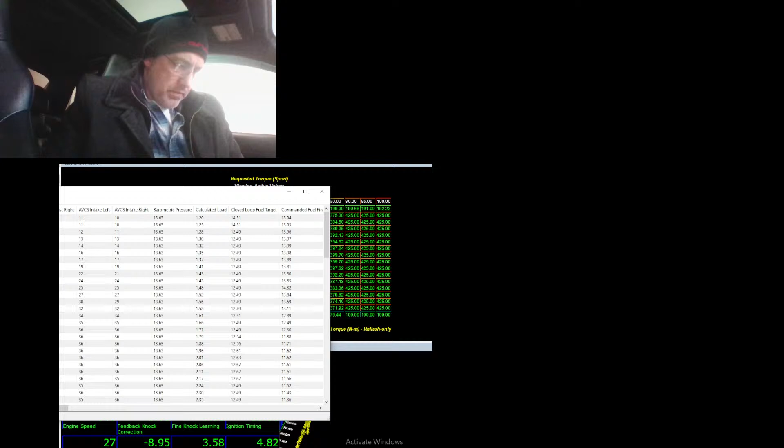Alright, so that dyno pull was rich as balls. In fuel final, you can see it goes into the 10s, and the air-fuel ratio at the tailpipe did in fact go to the 10s, so I can lean it out now. Always like to make sure that it's accurate, that it's going where I think it's going, before I start pulling fuel out during the tune. Otherwise, you know, who knows where it can go?

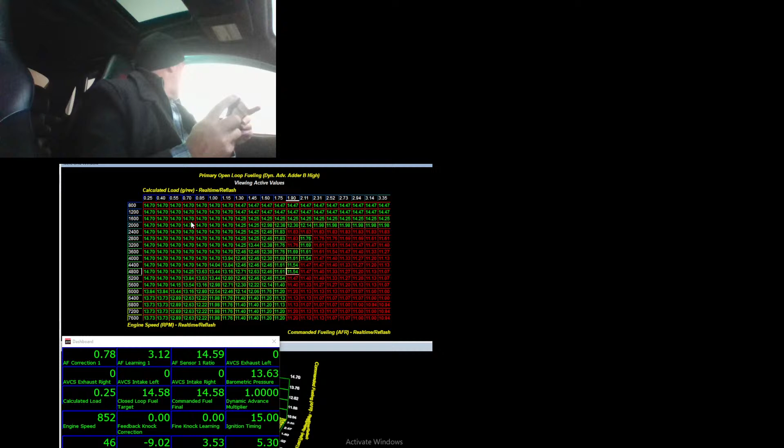Main fuel final still 10.6. Still kind of 10.6. Yeah, I'm not seeing any change at the tailpipe. It's really rich for 14 pounds of boost. I don't like that at all.

Wow. 304, huh? 304. It's 100 horsepower more than them showing at the wheels. I mean, timing's really conservative, but only seeing 200 at the wheels doesn't make sense.

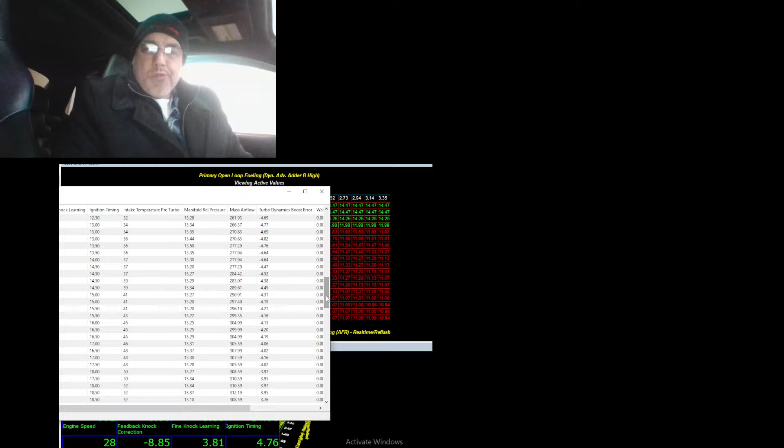I'm seeing 10 to 1 at the freaking tailpipe with a command of 10.6. Huh. MAF calibration looks fine. Injector scale is correct. Latency is correct. It's an awful lot of fuel.

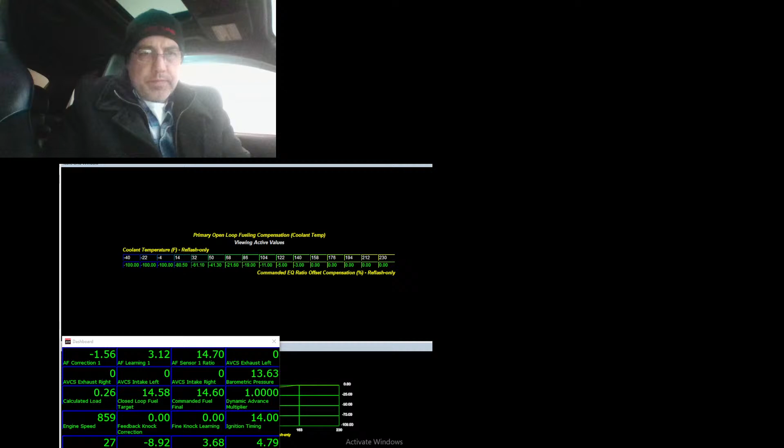Probably on the wrong fuel map. Yeah. I'm on the reflash fuel map, not the real-time fuel map, due to the weather conditions here right now. So that's a shame. Makes it a little harder to tune like that. It runs really good though. It seems to run really well.

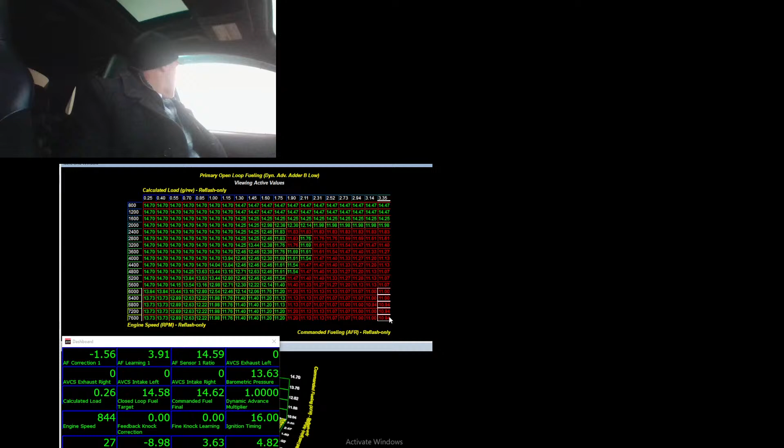Let's go to MAF comp and see where that's at. Zero. Load comp, 0 and 0. That's annoying. So it gets really rich right at 6,000, which is weird. I mean, there is this step here, but it is definitely rich at 6,000. Like this. Just make some lines, some straight lines for now. Oops. Wrong button.

Dynamic adder. Let's see what my condition's set at. Dynamic. Low. Low. That's high. That's good. Do want to lower that timing right here, like I said I wanted to before. Pull 1.5 degrees out. I'll pull a couple degrees out. There. 3. Right here. Okay.

Oh, it had timing too. I don't like this map. I don't like it like that. I don't see a point in that. If anything, we'd have less down here. Minus 50. High loads. All of it. Here. Knock barely happens up there. The big knock ranges are right here though. The biggest knock areas are right in this range, at higher load. So we'll do that.

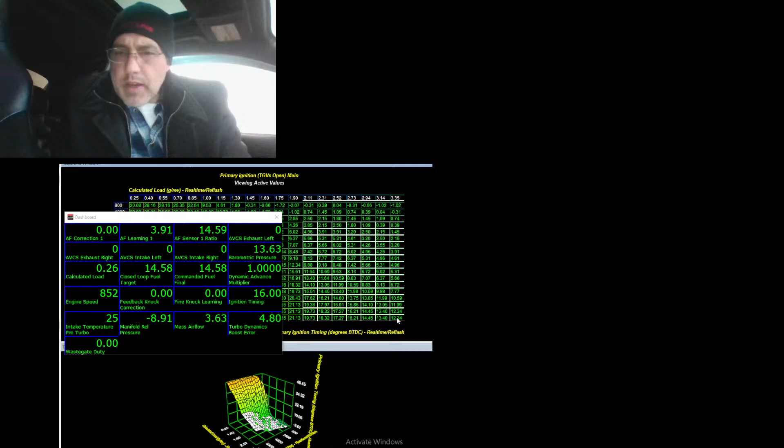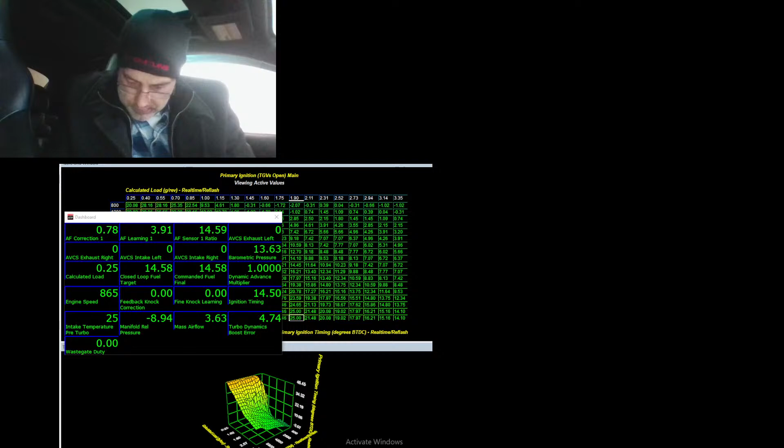Got that super conservative right now for the base map. I have that timing back in, down in this area. I just grabbed it for the base map from right here. Where was it? Right here, and I hit minus minus. So I'm just gonna plus plus that again. Bring that spot back up. Reblend this section like that. Alright. Gotta flash this, unfortunately. Might do some boost while I'm doing it.

14 pounds. So 14 PSI target, or I'm sorry, 14 PSI at 0 wastegate duty cycle. So when I get my targets in here, I'm actually going to compare to an existing map, so I can just cut the middleman. Where is a good one with a 2.15? This one probably is a good one. It's a decent 1.5 target map. Alright. So, bring this target map in. I like it. Okay.

Now, I know that it makes 14 on the gate. So I don't want to add any wastegate duty cycle here at 330 because it'd make the car oscillate. This is something for Kurt especially. He was talking about his boost before. But I know at 15.9 or 16, I need a little bit added to the gate to get that. So if I look at 340 and up, I need to add wastegate duty to that. So I go back to my wastegate duty table here and I look. So 330 is right here. This is going to yield me 14 at 0. So I don't want to add anything there.

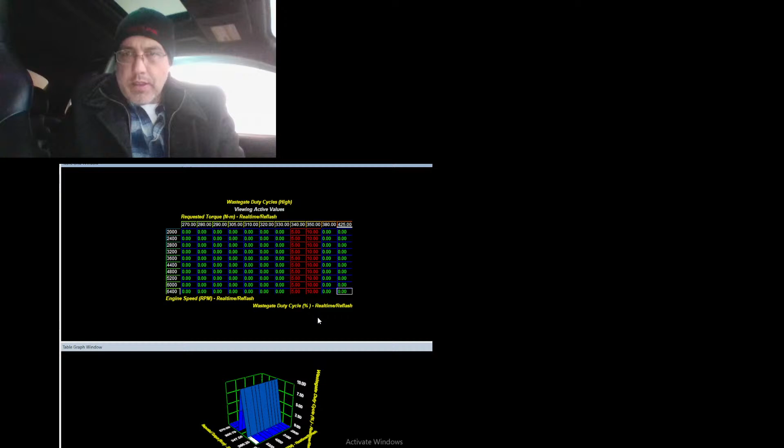Now, in factory form, there's a lot added there because the wastegate pressure on the factory turbo is 7 pounds. But this is 14 pounds, so I don't want anything to the left of that. Now, at 340, my target was only like 16 pounds. So I'm just going to do a blanket 5 right now. And then at 350, my target was 16.5, whatever. So I'll make this a blanket 10 right there, like that. Now I'll make these upper ones here 20 and a 15.

Hey Dom. Yeah, dude, what's up? What do you sell your crank pulleys for? 165. 165? Yeah. What's your availability on those? I got them at home. Okay. Alex is here and his crank pulley is wobbling all over the place. Who's Alex? He's a customer. And I was like, you should replace that ASAP, and then he asked what I recommended, so. Yeah, mine definitely won't wobble. You said 165? Yes. Okay.

Alright, so that's what I'm going to do initially, and then as I get a feel for how it behaves, then I will adjust it and add taper to it as needed, maybe a little tail off at the end, might go up, might go down, we'll see how the turbo behaves. Typically it goes up a smidge on this turbo, and then I add a little more duty cycle down low with lower RPM to try and make it spool a little faster.

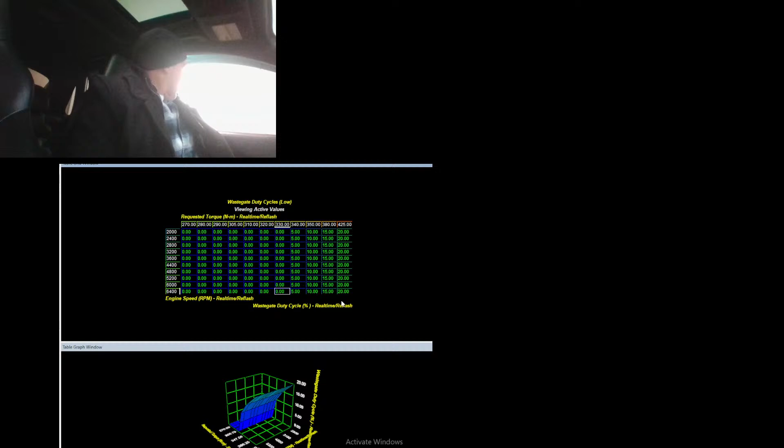But honestly, it's doing really good already. It's actually doing surprisingly well, and so what that'll look like is I'll take this area here, for example, and might make it 90, something like that. In fact, I'll just do it now, fuck it. Now, if you do it too close, though, you get your boost to overshoot, which you don't want to have happen.

The other thing you want to do to prevent integral windup on your boost control system is go to your turbodynamics, go to your activation, minimum RPM, bump that up. I did already. That prevents the integral from winding up while you're in an area where the turbo can never make boost in the first place. So I did that. Also, temperature compensation on these is set really high. I got to change that too, actually.

Because I moved the intake air temp sensor and because the system has a different set point in general, I start with half, and that gives me an idea. I've had to go down as far as 0.2, so 20% of what it is. And then here, I don't need to add 15% because 15% is definitely going to do quite a bit of boost. So I'm going to lower that down to 10. That just keeps my integral from winding up too far and all of that.

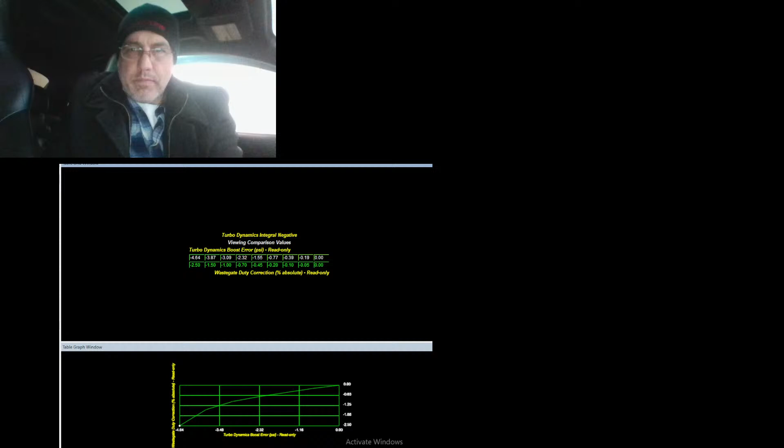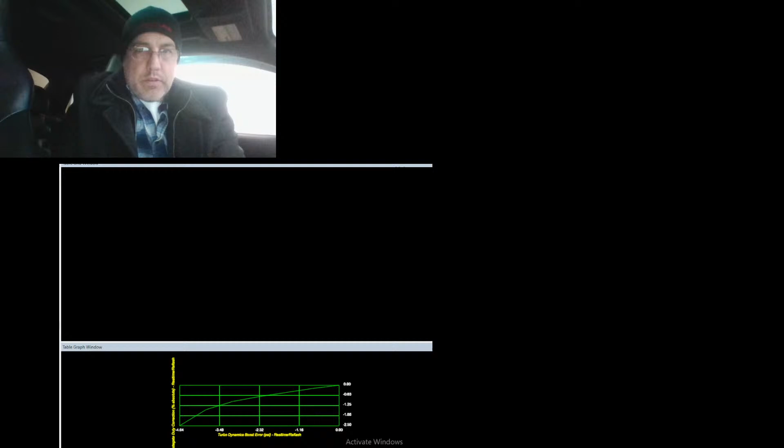These are... Why are they 0? What the fuck is going on? Oh wow, that's a trip. Okay, so I had no integral at all. Luckily I didn't try and do any boost yet. I must have hit 0 on it without realizing it. Alright, so there we go. Now I have the functioning integral. Perfect. Now we're going to flash this.

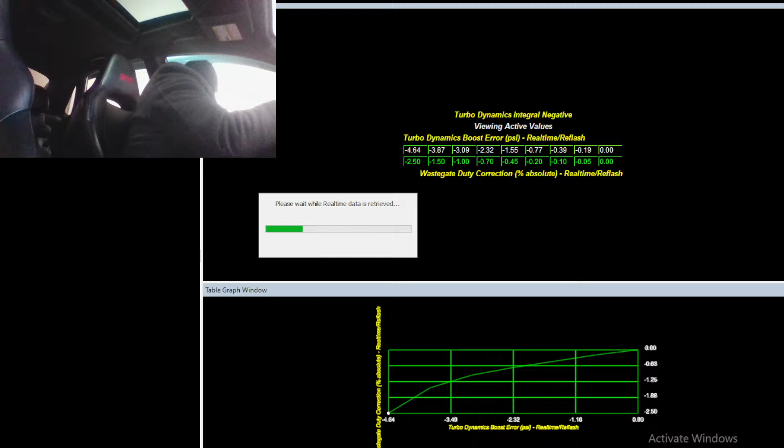I see the horsepower actually goes up. Oh, you know what? My temperature says like 12 degrees. I didn't hook the temp probe up.

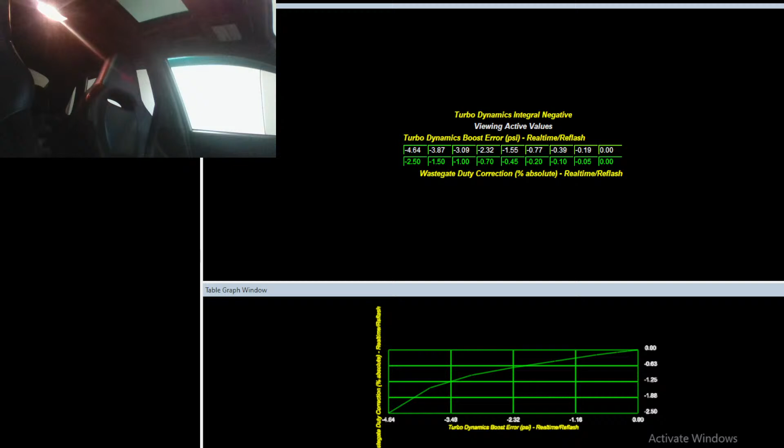Good. Glad to hear it. New boost controller on order. Good. I love the factory boost controller for the factory turbo. I tell people all the time, don't change it. You guys put 3 ports on the stock turbo. It makes no fucking sense to me. I cover that actually in my boost control video.

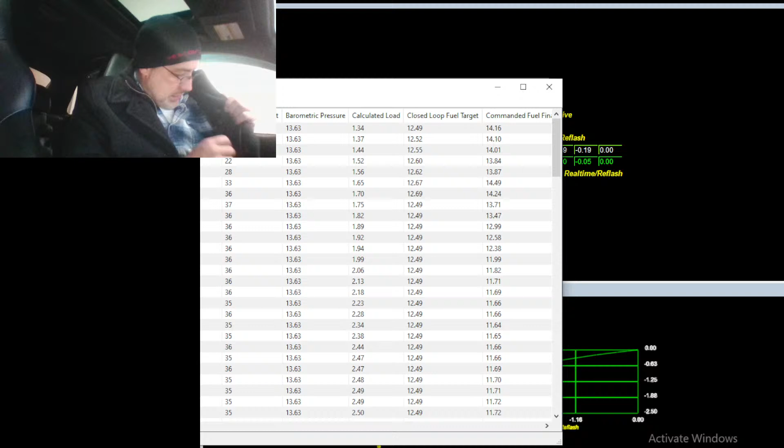So the ignition helped as well. And really, the ignition probably helped with the fueling too, because I had it so conservative that it probably wasn't getting a complete burn, and that was why the ratios were so damn rich. And that's something to think about too. It's kind of hard to grasp sometimes, but if you're not lighting up the air fuel mixture and burning it at the right time, you'll have a lot of unburnt mixture leaving the engine.

Now look here, my timing is still really conservative for 13 and a half, 14 pounds of boost. I've only got 17 degrees at 6,000. That is not a lot of timing. At peak boost, at lower RPM at 4,000, at 13 psi, I only got 14 degrees of timing. So that is really conservative, and I'm fine with that. I'm gonna mess with the boost and get it where I want it before I start adding more timing.

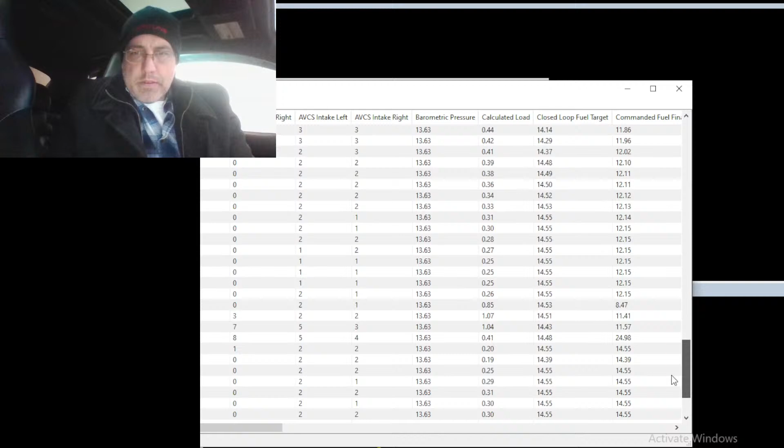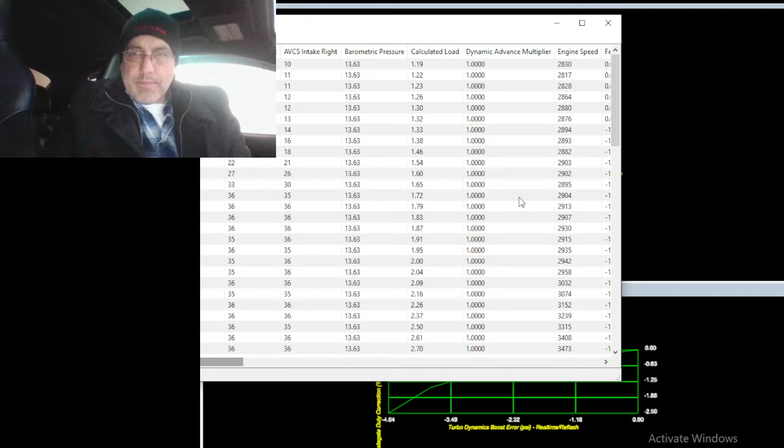It was clean. There was no knock feedback or anything that I saw, and AVCS is tracking as it is currently programmed. So that is good to go there. I'm happy with that. So I'm just going to add more duty cycle to the wastegate. Oh shoot, I closed that, didn't I? This is the last one. Yeah, it's the last one. Shit.

I didn't expect 20% to do it. That's not true. I expected 20% to give me some boost, but it didn't. Oh, you know, I didn't look at it. I should have looked. I didn't even look. That was not the best judgment of mine. I should have checked that out. Let me take a peek here. Just adding some percentage to my wastegate maps. Save that.

What am I at now? 28 degrees right now. Remember, this is post intercooler. This isn't even into the turbo. This is post intercooler. So I got a pretty big fan on. It's on high, blowing on the intercooler. As you can see, it's 20-something degrees outside.

And if they shoot up, that tells you a lot of what you need to know about your turbo, your intercooler, all that stuff. And that's why I always recommend that you move the IAT post intercooler, because those IAT temperatures, they will surprise you how high they get. And you'll be like, oh shit. The ECU has no way of knowing that that's how high they are if you don't do it.

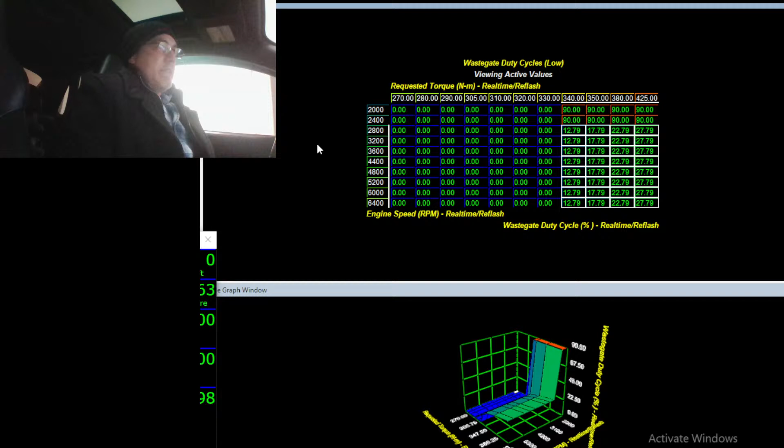We're not actually losing boost, we're losing air to the atmosphere, but we're bypassing through the intercooler, basically, to the suction of the turbo again, and that would reduce my airflow into the engine, and it would raise exhaust back pressure quite a bit, and that would blow the gate open sooner. And with 30% on the gate, man, I don't like that. Let me see what frequency I have it operating at. I should have it operating at like 25 to 28 hertz, which I do.

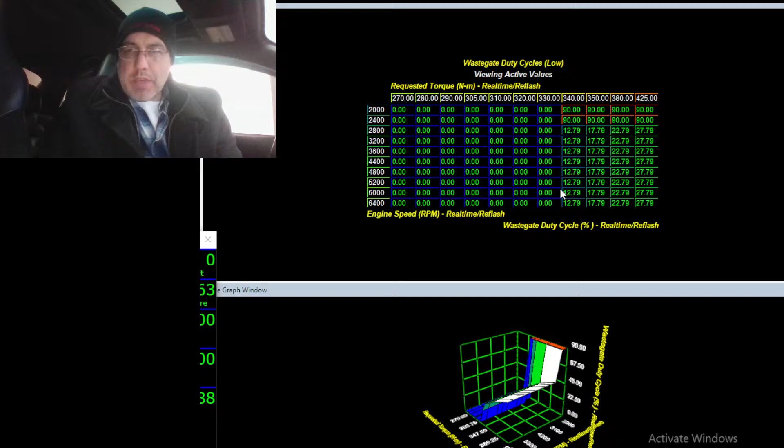So yeah, it should. It's not like I have the gate set wrong or the solenoid set wrong. I don't like it. I don't like it. I'm gonna add more to it anyways because I'm reckless. Just kidding. I want to see what kind of response I'm getting. You know, sometimes you reach like a tipping point, and then all of a sudden you get a lot of boost. So I might just be away from that tipping point a little bit. Okay, try that.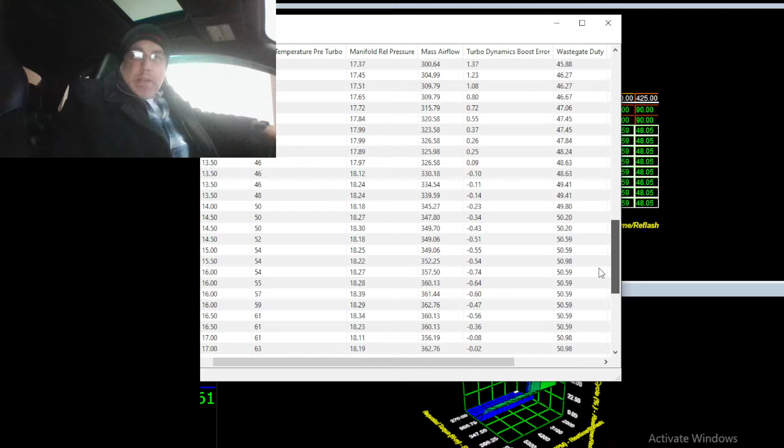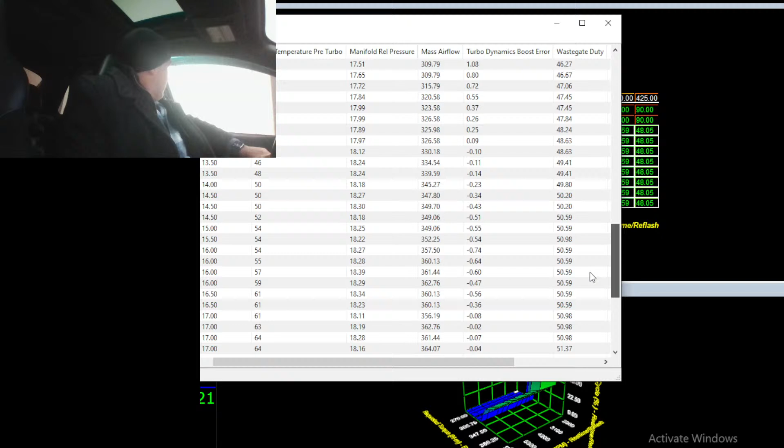So 42% up to 50%, and I finally hit my boost target. Huh. I'm not a fan of this. 50% and it only adds 3 pounds? In 12-degree weather? That doesn't seem right. That doesn't seem right at all. Alright.

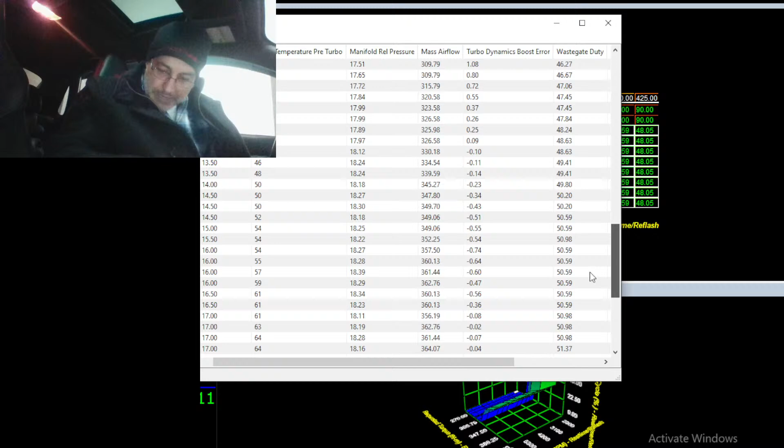Motherfucking blow off valves. Full atmospheric. God damn it. Alright, see what happens. Oops. First time driving stick. Oh, there it is. I heard it open there. Got a bunch of dash lights when that happens. It only moved when you shifted. Okay. Gave me a good blow in the face, though.

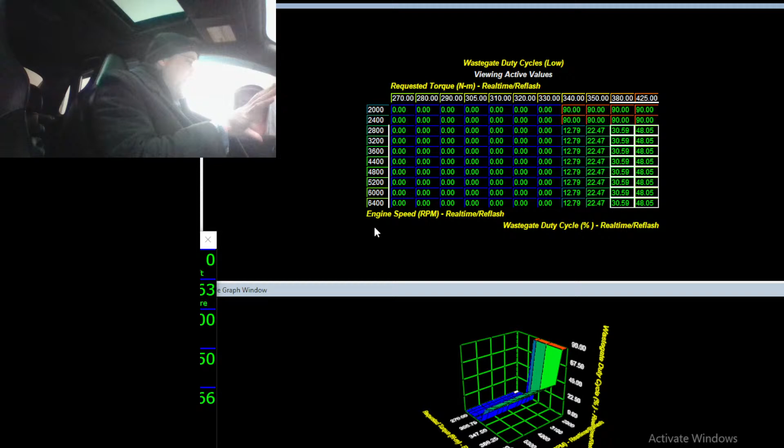Do you want me to close it? Yeah. I had a few lights pop up on the dash that went away. They would carry during the pull. One of them looked like battery and something else. So there might be a loose ground on here or something. Might be something we're looking at.

But the reason I'm doing that is because I got 50% duty cycle and only added 3 psi to it. And that seemed really weird. But I didn't change anything other than fucking with that valve. And I just added 2 pounds of boost to it by twisting that valve back and forth. So I think that valve might be lifting. Because I didn't change a fucking thing since the last pull. It did that, and the boost went up 2 pounds. So I think that valve's probably just a piece of shit.

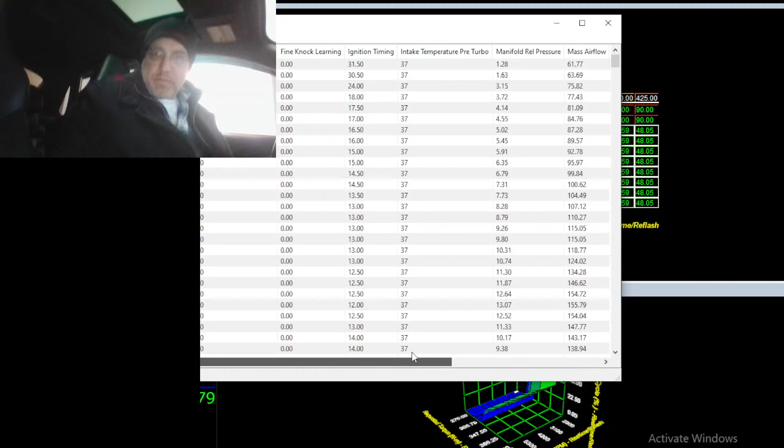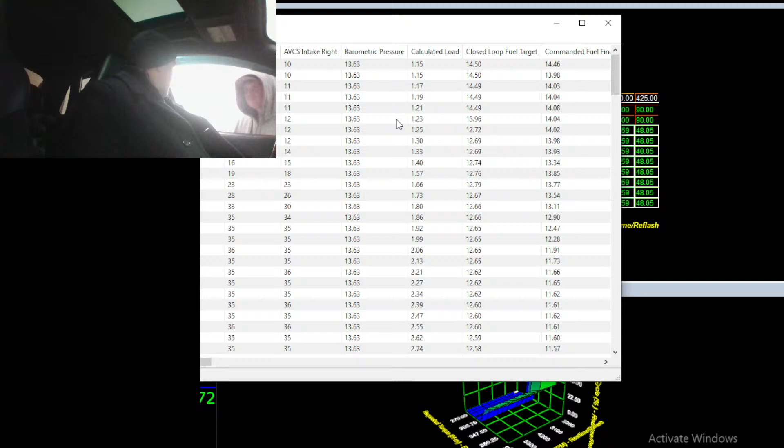No. But the lights still came on again. During the pull. That's kind of a weird one. Yeah. It was battery and something else on the left there. I don't know which one it was. But they came in like that during the pull. So there might be a loose ground or some shit somewhere too.

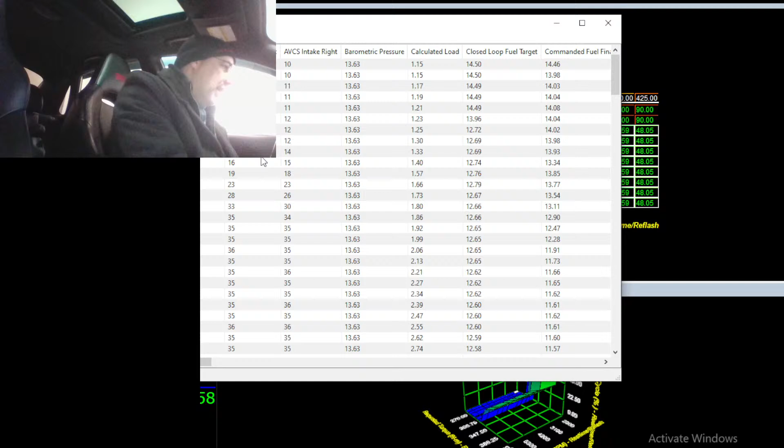But it went, I mean, I don't catch it, you know, and then it starts happening again. I just had to look at the tach, and it goes, bing, bing. So 2 lights over here. Let's see which ones. Look, it might have been battery. It's either battery and oil or battery and rear diff temp. Interesting. Yeah. We'll have to check all the grounds when it's done. Hopefully not oil.

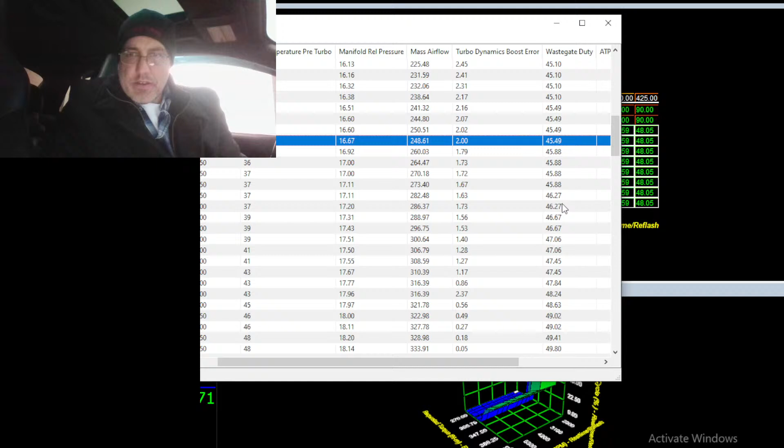Yeah. So we tightened up the valve a little bit, wiggled the thing. It didn't make a difference from the last pull, but from the last pull and before that, there was a big difference just by wiggling the valve itself. I hate those valves. So it starts at 45. It's really slow to build. So if it's really slow to build like this, we got 2 pounds, and it's not adding duty cycle very quickly, that means that the integral is not high enough.

And what that probably means is in the boost control tables, you saw me mess with them earlier, in the turbodynamics compensation, this section here, we're down here in this low temperature, and so it's reducing the turbodynamics by 30%. That's a lot, especially when I've already reduced the turbodynamics to keep from being too sensitive because of the turbo. Now this is a little on the low side, but if I compare it to stock, again, the different wastegates, all that kind of stuff.

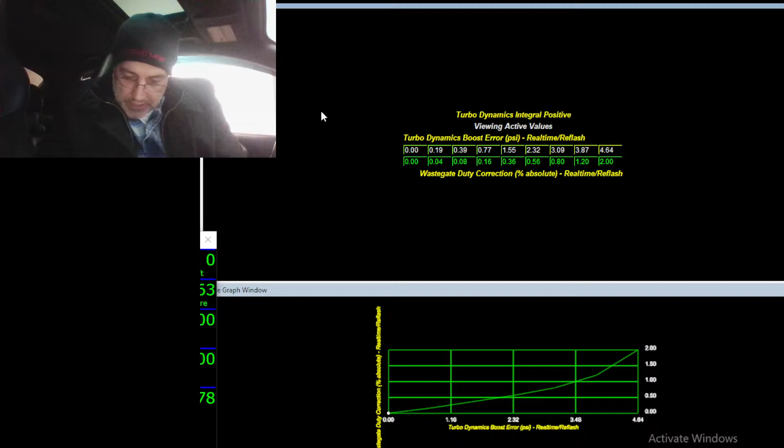We see stock is 5, so I have it less than half of what factory would be, and that's not surprising if the gate only needs to move 30%. You'd expect that, but right now I'm at 50% to add a few psi. So I'm actually going to bring this up and bring it closer to the factory one, but not a lot closer. That's the key there. I'm only going to add about 45% to this one, and I'm going to add 45% to this one.

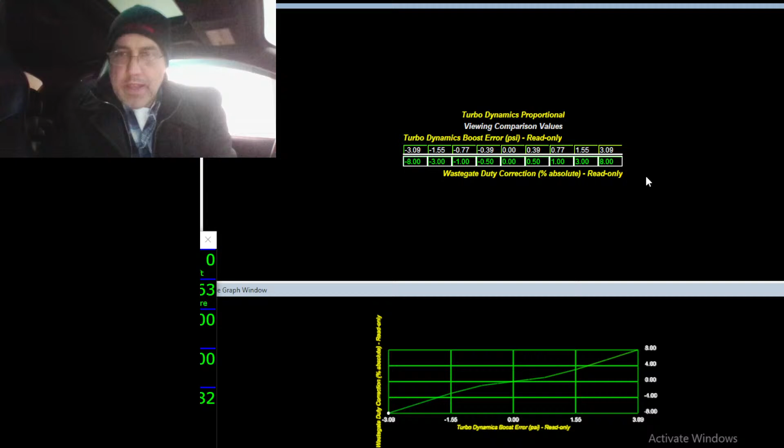Actually, I'm going to add 55% to this one. I still want to be able to pull down boost quickly if it needs to. That's also what the proportional behaves in here, and I'm going to add a little bit to the proportional, 20%, 25%, because I wanted to give it a little more authority in that area to respond quicker to boost changes.

Now, proportional doesn't do jack when you're next to your set point. Proportional is more when you're really far from your set point. So you can, in fact, go close to stock and have this be really big and have this one be really small, and it'll aggressively push you towards a thing. So I'm actually going to go 5 here, like this, and then I'll go -5 here. And that'll only try and push it close to your target faster, but then you see it reduces way down as you get close to your target. So it only really has an effect when you're away from it by a distance.

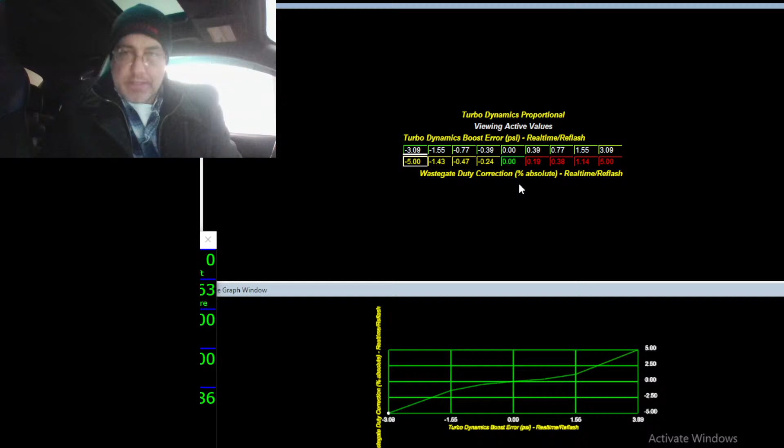The integral, on the other hand, is continually adding to it, and so it's over time. So as you come in, you're not losing integral here. You're still adding integral. You're just adding a smaller portion as you approach your target, like we have here. So I added a few percent here and there.

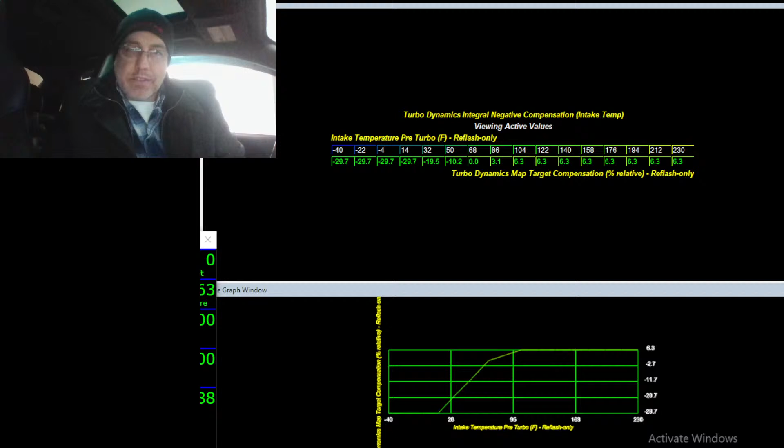And the temp thing, yeah, this is 30%. I think this is too much still. Remember earlier in the stream I said that I usually take this and I can go as little as 60% of what it was. So I'm going to do that, like so. Now that one requires a reflash, so I do have to disconnect to do that, and then I reflash it. The other ones are real-time adjustments, so I didn't have to disconnect for those. But anyways.

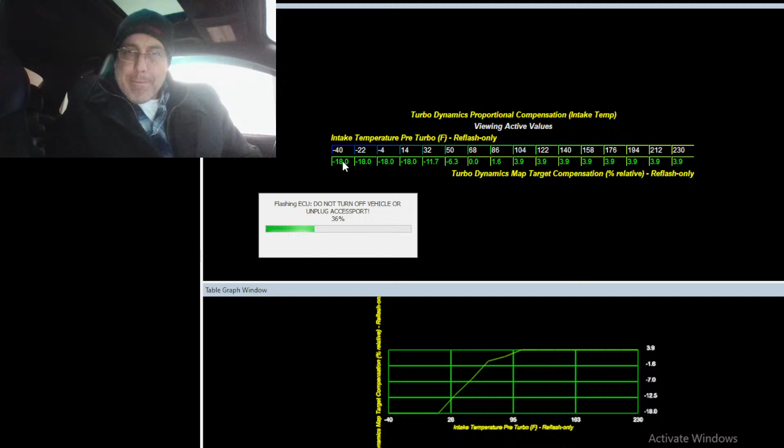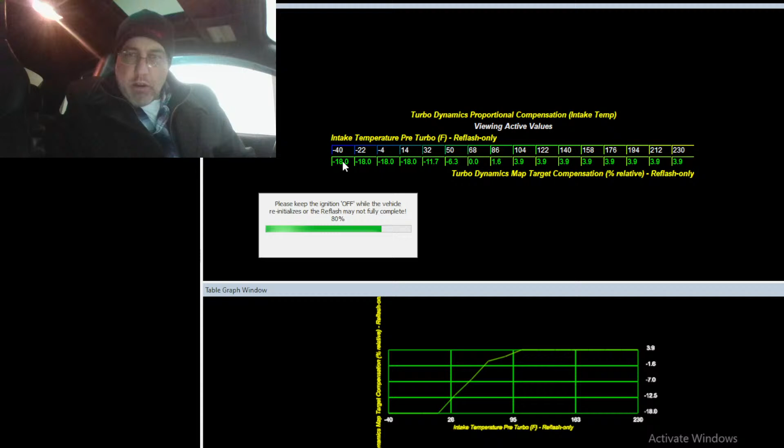Now, the reason I turned these down really far is because these are more dependent on the inlet temperature to the turbo. If you think about what this is doing, what it's saying is when the air is less dense, we know we got to try harder to make boost. The problem is that we moved the IAT and now it's post-intercooler, so the density of that air is dependent on the turbo itself as much as it is atmospheric temperature.

So now what I'm looking at is if the air coming out of the intercooler is hot, I don't want to keep trying to push boost in the engine. And if it's really cold post-turbo, then that means that it's definitely cold pre-turbo. And so I still want to pull some out there, but I don't want to go too crazy with it. Because there's also wastegate trims based on this. This is just how sensitive the controls are to it. And it's just saying that if it's really cold, the controls are more sensitive, which we expect with really dense air.

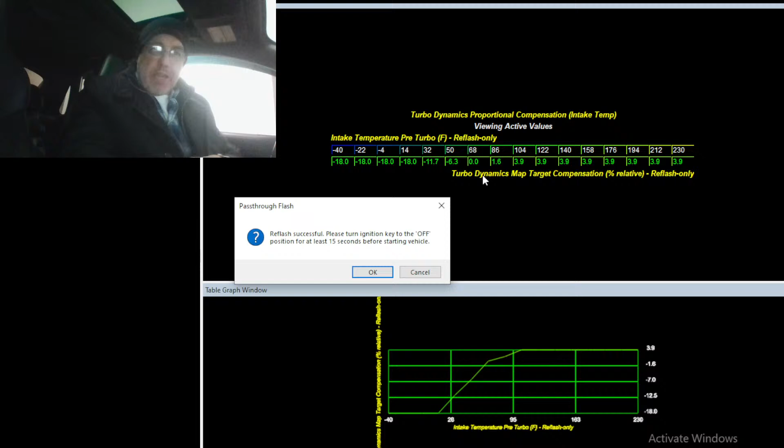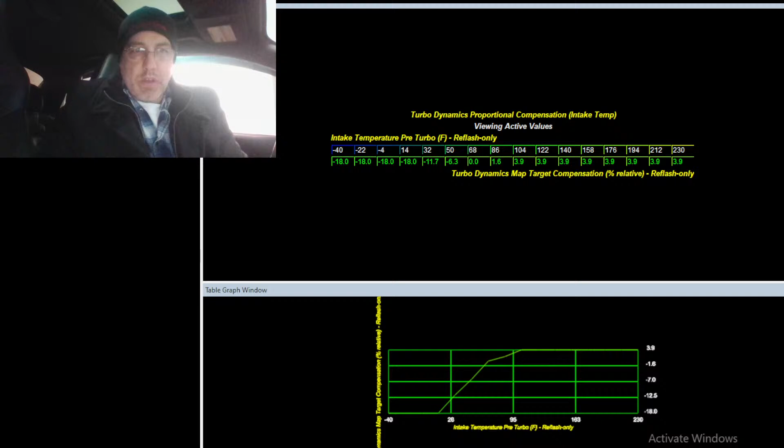Now, when we get to wastegate duty based on temperature, there's trims for that, which you definitely want to take into account. Which is in the wastegate duty tab. If you go to intake temp comp, then we have this. Now, you see here we got 15% being pulled. That's probably too much because we're down here right now. But we'll find out. I don't want to pull off that too quickly.

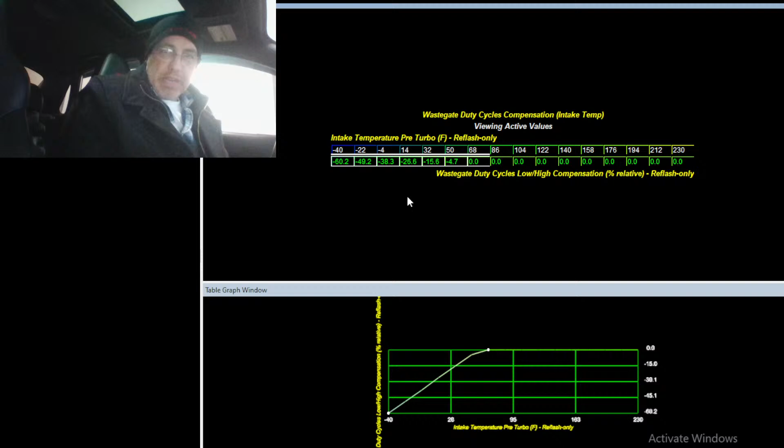But you have to think about it too, though, right, with this. Now, if I have it minus 25 right now and I hit my boost pretty good, is adding 25 going to be too much to add when it gets hot? Probably. So I'm probably going to have to cut that down anyways. And again, that's based on what car you got, all that kind of stuff. So I'll probably end up killing that down, probably to half of what it is before I let it go.

One thing I also do is I'll lower it down here because we're now post intercooler, right? And for post intercooler, if my IATs are getting to 170, I don't want it to get way up there in the boost target. I want it to have less ability to do that because I want to save the motor. I don't want to push 180 degree air into the engine at the high boost targets that we set. So I don't mind knocking that down some to protect the engine. A lot of my tunes you'll see have that spot up top pulled down some.

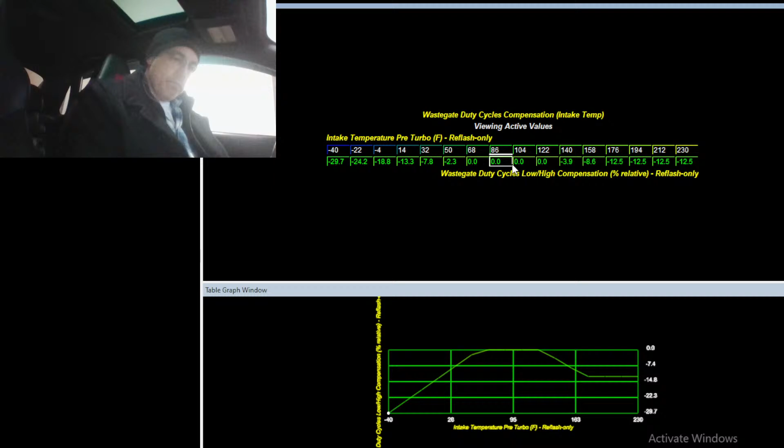Okay, on, lock, traction control. I'll get back online. Let's save this. Get back online. Well, it took a while to connect that time. Alright, O2 sensor is live. AVCS is functioning, so we shouldn't be in any post-start enrichment. Closed loop fuel target and commanded fuel are both around stoichiometric ratio, so that means that we should be good to go.

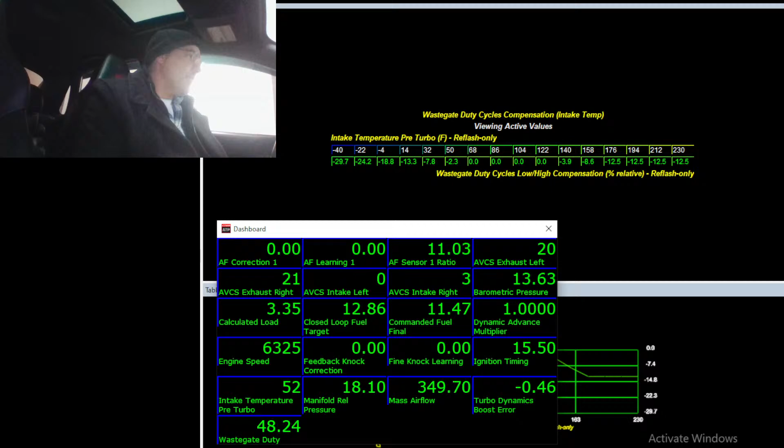It's clean. I can see the battery light come on. That pull. Boost was a little more aggressive. The wastegate duty, I said duty. The dynamics were a little more aggressive, but not a lot. I definitely could ask it to be more aggressive there. Yeah, it could definitely be faster.

Okay, so I'm going to keep restoring those dynamics closer to stock and bump them back up, make them more aggressive. This temperature one, though, is probably affecting me. It's probably why it sits for a while. It has to overcome the 15% from temperature that we had pulling out of it. Or 20%. So I knocked that down some. I might knock it down a little more even.

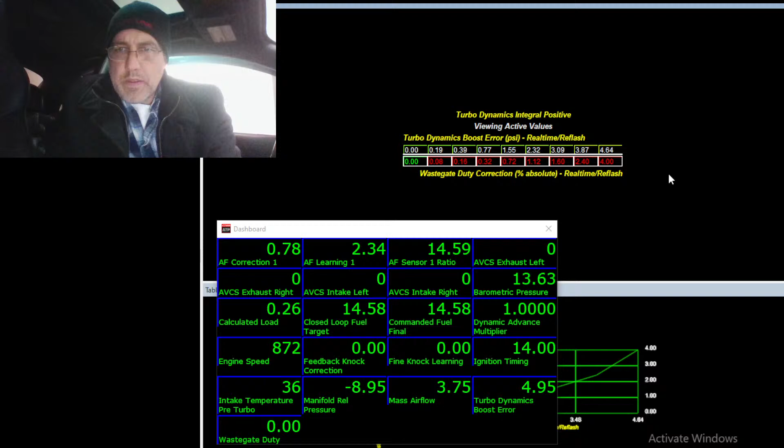8, 7. No, I'll pull a tiny bit more out. I don't pull too much out. That's looking like it's about where it's going to want to be with cold temps and hot temps. Okay. And then this one, proportional. Got a little more of the integral. Let me go back to stock first. And then I'm going to pull 20% out of it. Like that. See if we can get it to be just a little more aggressive.

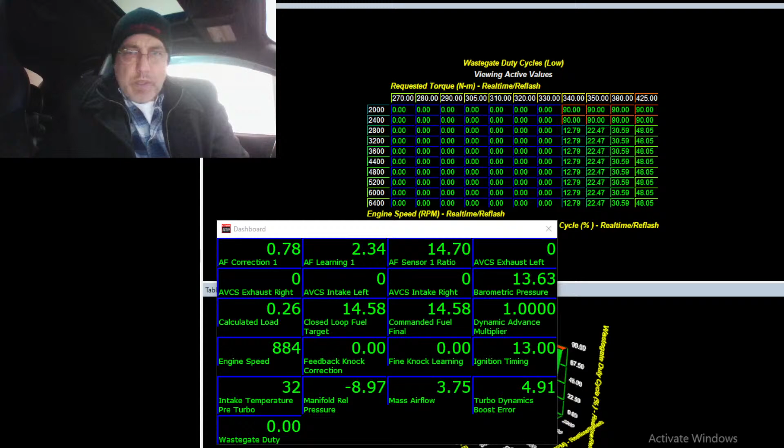I don't want to go and induce an oscillation. Definitely don't want to induce an oscillation. I might add a little bit to the proportional as well. Alright. Let's see what we get. Oh, shit. I did a reflash table, didn't I?

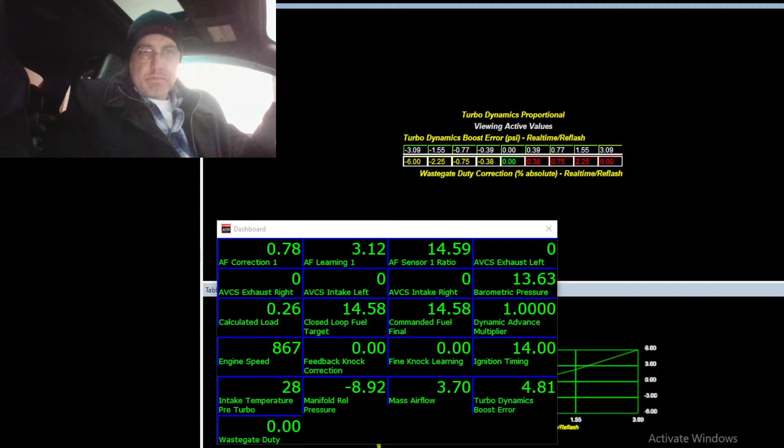I also want to check my boost limit. Make sure I don't go blasting into boost limit. Oh, yeah, see, I'm close. I got it set at 21 right now. So let's raise that. Okay. That's a lot of hysteresis. I don't like that. Make it tighter.

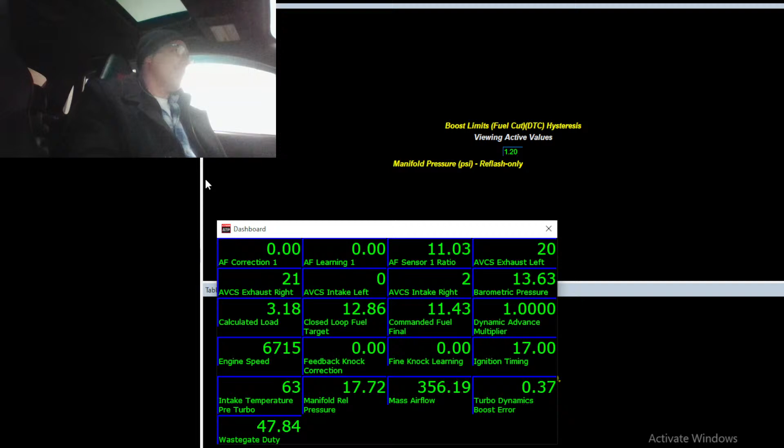Okay, one knock event on that pull. It attacked the boost quicker, that's for sure. It attacked boost quicker. It added some down low. We'll see that here. Yeah, see how much faster it comes in now. 48, and actually gets to the target way faster. That's good. Timing's good and conservative.

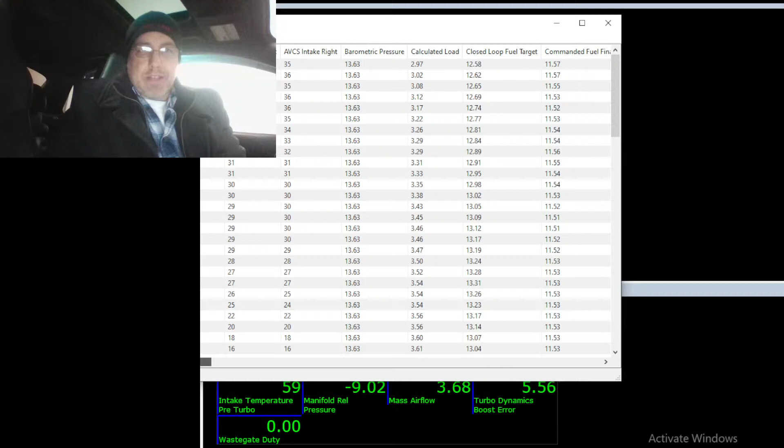Where did I get the event at? Where's it at? Oh, at tip in. Okay, so that wasn't even a... So that's a tip in event. I should have been paying attention to that. That won't happen again. That probably won't replay. I mean, is it really knocking at 8 degrees of timing? No. That'd really be something if it was.

Okay. Cool. I'm pretty much done here. Yeah, test it again. I've never had one stay in third unless you start at like 3,500. And even then, it's only sometimes, but I don't start at 3,500. Unless I have a gigantic turbo and I'm on this dyno, then I have to start higher, sometimes as high as 4,000, because this dyno operates off of ramp rate.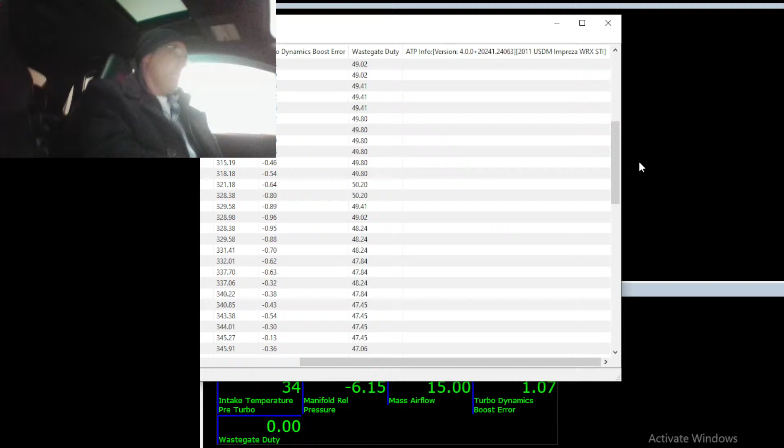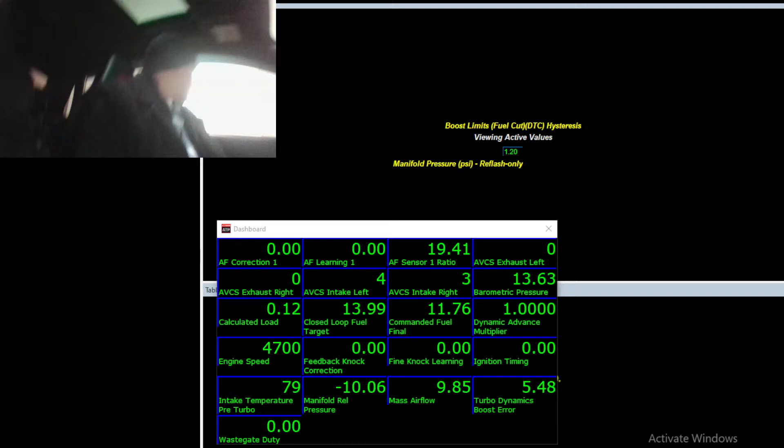Let's try it again. I don't think it's going to do tip in knock again. I'll be more cautious with how I tip it in. Boy, the car's trying to get loose on the dyno. What's the IAT at the end of the pull? I feel like that's going up. Oh yeah, it is, for sure.

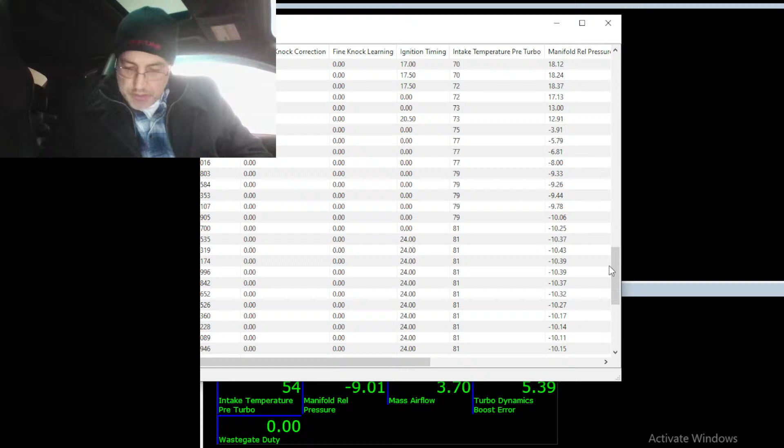Now, this IAT, it's not that accurate. And I'm only saying that because it's a GM sensor and they're not as fast as people think they are. You can see here, for example, I let off up here and the temp keeps going up for a ways, but it goes up after I let off. So that sensor is getting heat in it and it's trying to catch up to the temperature. It's really hard for any temperature sensor to provide you fast response. These just aren't exceptionally fast.

There are faster ones. The one I sell is significantly faster than this. The rifle one is really fast. And part of that is the mass, right? That GM one's got that big slug on the end of it. There's a lot of mass in that. It takes a while for that to heat up. So it's not as fast of a sensor as mine, which is the tiny little NTC thermistor in there. That little guy is really small, so it heats up a lot quicker. But this is a GM sensor, so it's only so good.

But that means that right here, when it says 50, it's probably 70. And up here where it says 70 or 80, it's probably 100 degrees. It's definitely lagging behind. Now, that's still better than reading at the inlet of the turbo where it's still going to be saying 28, right? Or something like that. So it's still a benefit.

But one reason I use my sensor is because it is faster responding than the GM one. But it's harder to put in top mounts that are factory because you have to weld that bung on and there's not much room. So if this was a Grimmspeed intercooler or something top mount, it would have my sensor on it. But it's not. It's got a GM one. So that's why. Otherwise, I think I'm done.

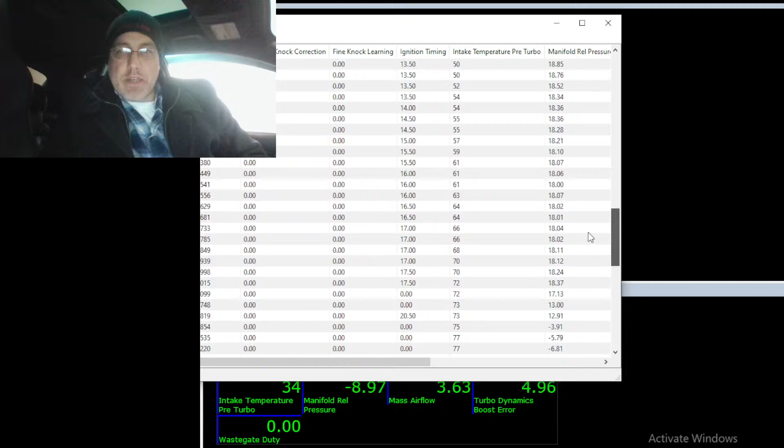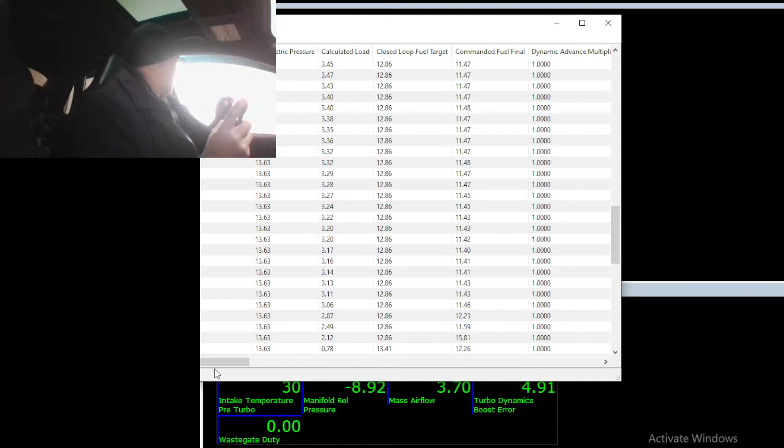I like where the car is at. The power's good. I'm not having any knock other than that one tip in knock, but that should happen on occasion. Everything is tracking really well. The boost is nice and steady. I've had no issues with boost control other than it needing more than I thought it would need. I haven't looked at the horsepower curve though, so I'll probably do that. Yeah, that's great. Great horsepower and torque.

And crossing at 5252 is a good way of knowing that your tuner is not screwing with your numbers, trying to blow smoke up your ass, or adding huge multipliers to the readings, which a lot of them do, unfortunately. And it's easy to see if your horsepower and torque are on the same axis, and they both say like 600 at the top, and then horsepower crosses at like 4,000 RPM or 3,000 RPM, your tuner's lying to you. He's added a multiplier to the horsepower value, 20%, 30%. A lot of them do it.

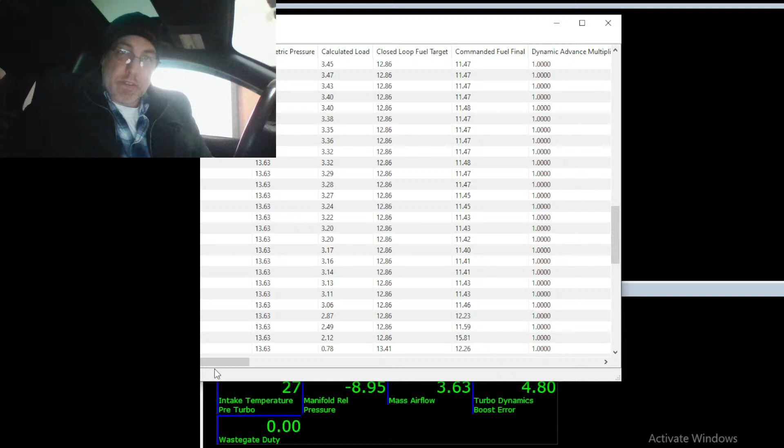No bullshit corrections. So, anyways, that's it. I'm done with this car. I'm happy with where it's at. I got to hopefully help you guys understand how boost control works a little more. A little bit on spark plugs, coils. What else are we talking about? Intercoolers a little bit, bypass valves, and a few other things. So I hope that was somewhat beneficial.

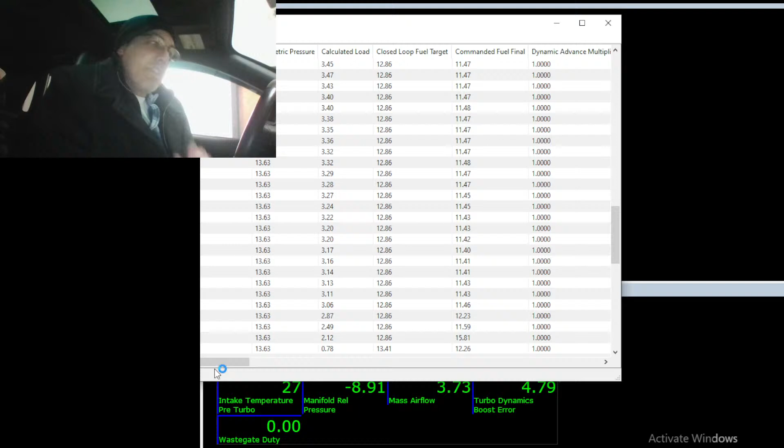That being said, next semester I am taking more classes, so I'll have even less time to do it. But this is my last chance to utilize the rest of my GI Bill. My GI Bill expires in October. So I want to use as much as I can before it is over. I mean, I spent time in the military, so I should probably capitalize on the allotments that I put money into. So that is what the next 7 months or so holds for me.

It's Christmas. I get to see my daughter. I'm excited about that. I haven't seen her in a couple of years, so I'm super happy about that. I am really, really, really excited about that. A lot. So that's gonna be cool.